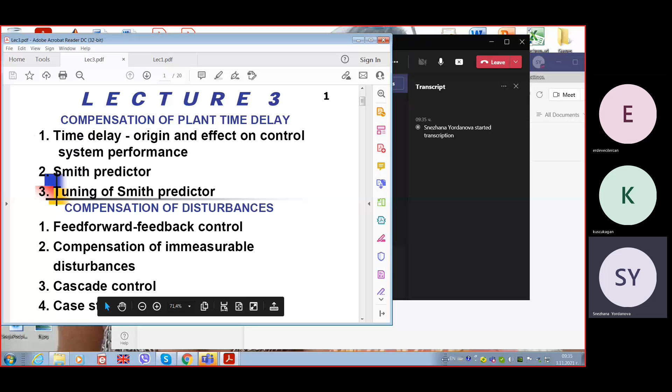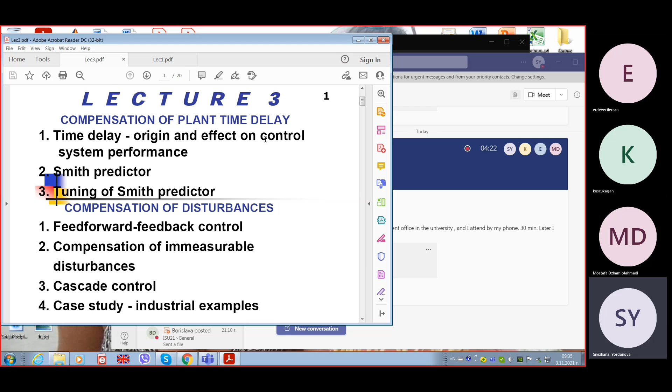So process control, manufacturing automation or production automation. Today's lecture on 3rd of November is about compensating of different imperfectness of the characteristic of the plant. We start with very high relative time delay, its origin, effect, and why it's necessary to compensate.

Compensation of the plant time delay means that the plant model, which is first order time lag, this is the plant model, time lag and time delay. The ratio tau over T is greater than 0.5. This can be due to different reasons. Approximation, of course, because we have experimental S-curve and the model time lag with time delay in series gives this dashed line.

As a result, they tend to join the two lines, the experimental and the model. But there is discrepancy between the characteristics, and for the time when this tangential line crosses the axis, this tangential line in the inflection point covers the linear part of the step response. So it crosses the axis, which is time, in a point from which to the origin is the time delay.

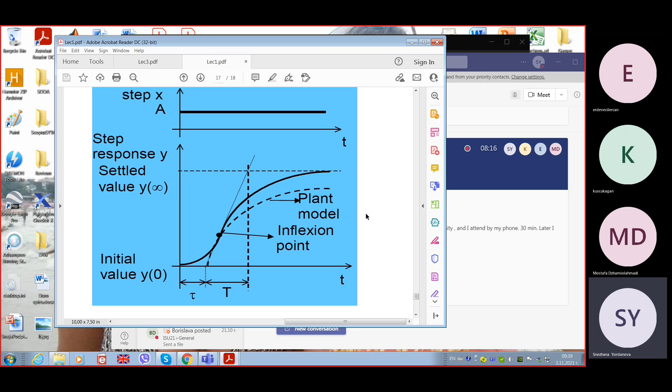So the next reason is that we have a very long room, and the variable we control, for instance, temperature, takes different values and has different step responses at one and the same change of input. The change of input is hot ambient temperature in the cooled room during summer, and when this temperature is measured in different volumes, equal volumes, but the room is very long and it's divided into different volumes, within a volume we have one and the same step response.

So θ1 is temperature in volume 1, temperature in volume 2, and so on. But these responses differ in adjacent volumes. This is because temperature depends not only on time, but also on space variable. Here only the distance is important, but space has three variables.

So if we consider that within a volume we have time lag with time delay model, Ziegler-Nichols modeling of this step response, the parameters will differ from volume 1 to volume 2 to volume n, the final volume. So we'll have different tau, T, and gain. The gain was delta change of output per delta change of input.

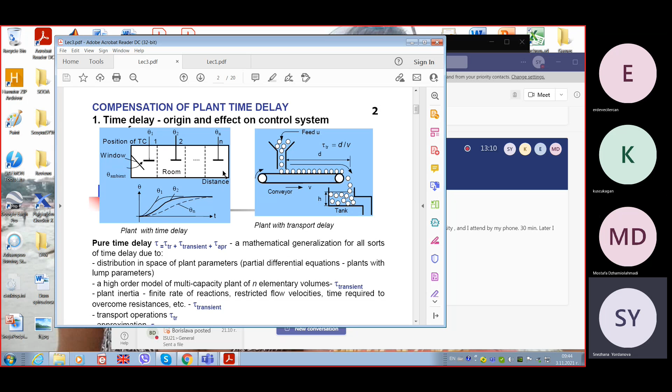These distributed parameter plants are usually presented by separate Ziegler-Nichols models for each volume. So we have in series several plants. So we have a plant of high order because the series connection of transfer functions is the product, and the product of several time lag elements means a product of several polynomials, and the denominator is responsible for the order of the plant and the order of the closed loop system also.

So we increase the order of our plant by presenting space distribution by series connection of simple Ziegler-Nichols models. So the delay origin is now clear, and what we have is why should we compensate the relatively high time delay when it's greater than 0.1 or even 0.5, when it is greater than 0.5 or even greater than 1.

All methods for tuning of controllers expect that this ratio is less than 1. When it's greater, this means the delay is greater than the time constant. Then we need some compensation techniques for this great relative time delay because it affects the stability of the system.

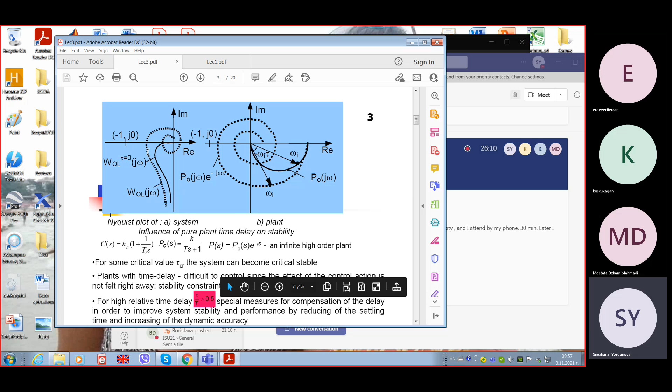So we take the biggest possible gain, and the system will remain stable, no way to violate stability. So when we add the delay block, if the plant needs a model with time delay and the time delay is very high with respect to the time constant, we'll obtain this snail shape of the Nyquist plot of the open loop system, which at some critical value for the time delay can make the system critically stable, or even unstable if this characteristic crosses the negative axis beyond the Nyquist point. So somewhere after this Nyquist point.

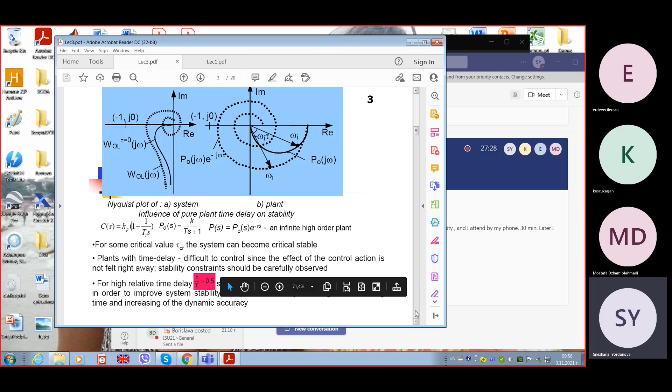So what is important is that we have limited gain of the controller, which has to account for the time delay. So the greater the time delay, the smaller the gain of the controller. We cannot expand this characteristic that much. And at some very small gain, because the delay is very high, our control is not effective. That's why we need compensation measures for this high time delay. And there's a simple scheme, the Smith predictor.

The Smith predictor is using artificial feedback with a specifically designed transfer function, which encloses our standard controller. For instance, we have a PI controller C(s), and we have to compute the feedback in a way to eliminate the presence of time delay in the denominator. So the closed loop system contains a plant with time delay, and it's present in both numerator and denominator, and we'll try to compensate through this feedback only the stability impact of delay, so the delay block in the denominator.

So this is a standard closed loop system without the feedback. And when we put the feedback, the feedback controller is called Smith predictor because it predicts the behavior of the plant when the delay elapses, when the time is greater than the delay. And this predicted behavior is properly accounted for with the control action.

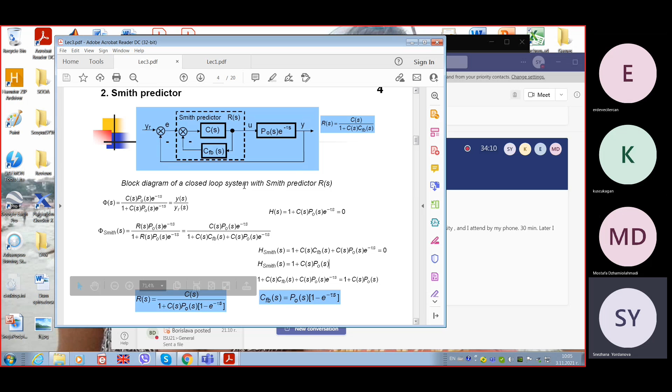So let's explain how the compensation is accomplished. During the time delay, our controller should work with a smaller gain. Let's have proportional controller because it's easy to explain. And this is the feedback. Plant model without delay and parallel 1 minus the delay. This is a negative feedback. When we apply step change of error, the controller reacts with step change of output modified by the gain of the controller. So this dash line could be if we do not have this feedback to the controller. But with the feedback, what happens?

At first, the controller responds with the control action, which is Kp multiplied by E, but then this output feeds a time lag, which with minus appears in this summing element. So time lag, it is the signal minus V, and time lag, but after the delay, so we repeat this reaction, but after a delay time, and because here we have minus and this is minus, minus and minus in series, the result is plus. So the blue line, this exponential growth shifted after the delay time, is the signal W at this point, so taken with plus. So at this point, we have to sum these two signals to obtain the feedback.

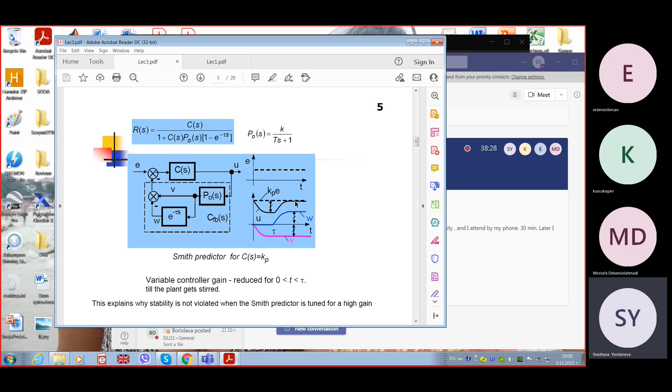So this feedback stops operating after some time, when we have almost 2 times time delay. So for the time delay, when we need smaller gain of the controller to ensure stability, we have this adaptive smaller decreasing gain. After that, we have perfect behavior. We can use high gain. We'll obtain good compensation of disturbance and fast following changes in reference. So reduce dynamic error with high gain of the controller. So this is how the Smith predictor acts with adaptive gain, and the idea of tuning of the controllers is modified.

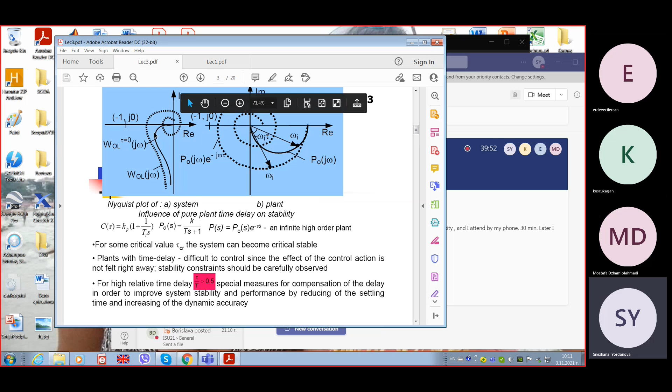You cannot tune your PI controller using these engineering formulas we studied in previous lecture, but we have to account that the presence of the feedback is making the system characteristic polynomial a second order system, because the delay is no longer present in the denominator, and when we have PI controller and time lag, the system is second order. So second order system I showed you. The Nyquist plot is the solid line. PI controller with plant time lag without delay. The open loop is this product, and the Nyquist plot, when S is substituted by J omega, gives this result for different frequencies.

We can expand, so what we are going to do, use very high gain of our PI controller, considering only the range of input. So in our first laboratory, we assign gain of the controller 10, the top possible. Then we have a second order system. We can use one of the methods for tuning of second order system. I will revise taking lecture 2,

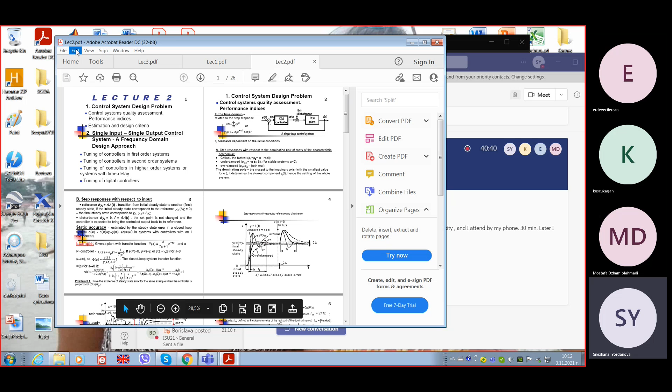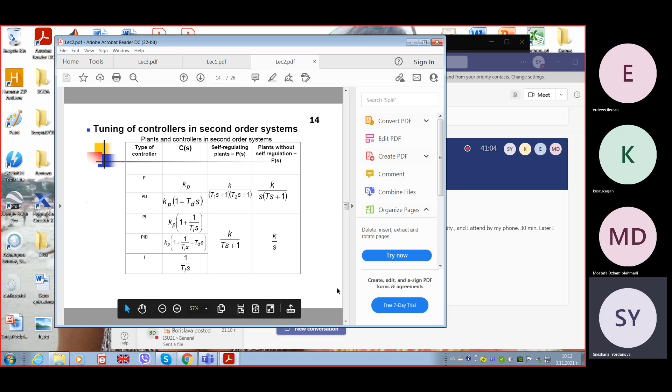and we started tuning first order system, second order system. So this is first order system, and here the combination PI with plant model time lag gives a second order system, and the possibility is to allocate two roots of the characteristic equation, one very far from the axis in the root plane, the other at distance which is related with the settling time.

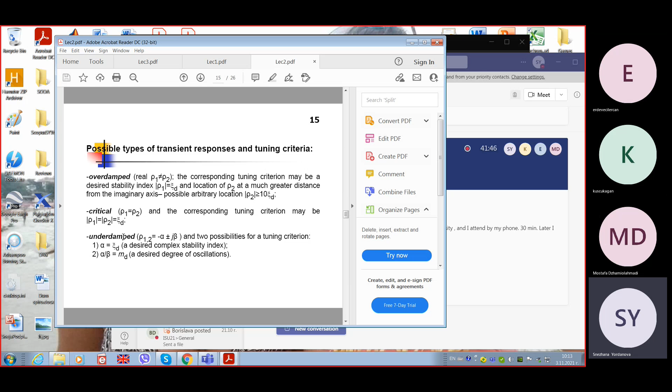Or we can have equal real roots, and that will ensure critical step response, only with one maximum over the reference and no oscillations, or underdamped process if the roots are a complex conjugated pair.

We use the characteristic equation to obtain the roots, and then if the discriminant is smaller than 0, so it's negative, we put a negative sign and the imaginary unit here to make the square root of a positive discriminant. So this positive discriminant with the numerator gives beta in the root, the imaginary part of the complex conjugated pair of roots, and this is the rest.

This part is alpha, the real part. This is positive, and the minus shows that we ensure a negative real part, or a stable system. Alpha over beta gives the desired degree of oscillations, so the degree of oscillations is related with overshoot and other time domain performance indicators. So we select the desired degree of oscillations, and the result is a relationship between Kp and Ti.

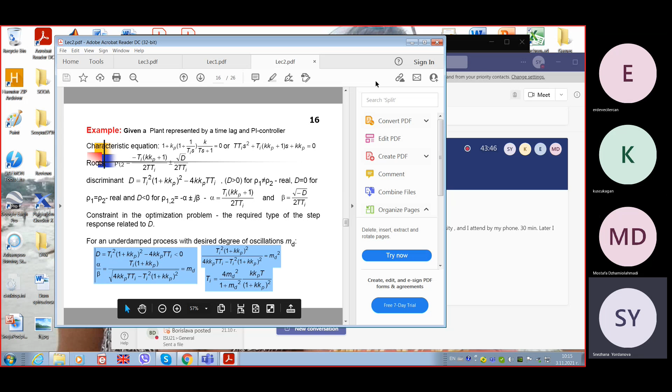Kp is 10, so we don't need any other second criteria. So Ti is computed on the basis of the plant model, time lag model parameters, the desired degree of oscillations, and the top gain of our controller. So this is important. If we do not use the highest possible gain, which allows us this feedback, the feedback cannot be tuned because it contains parameters of the plant model.

The plant model is necessary to tune this controller to obtain the feedback, but we can tune the controller knowing that we can use a very high gain, which is not possible if the system contains time delay in the denominator, or the plant has very high time delay. We need the feedback first, and then we can have very high gain.

So if the plant changes with respect to the model which is put as feedback to the controller, we will have worse performance of the closed loop system. So it's important to be sure that the plant model is precise and the plant doesn't change its characteristic with time or under different influences.

So the high gain ensures very short settling time, the high gain and the feedback to control. So the Smith predictor is more effective when we properly use the possible high gain of the main controller, the standard PI controller.

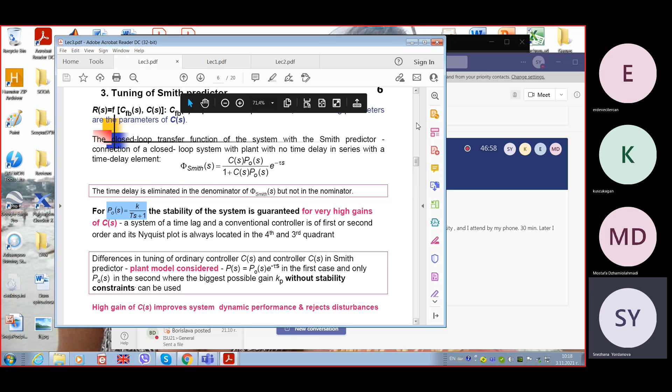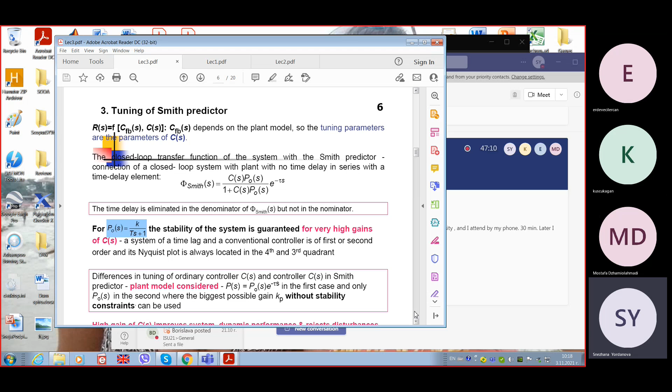So we compensate with feedback only the denominator. So we try to get rid of this time delay, but this is preserved. That's why the step response has an initial time delay from change of output. So from here till settling, practically equal to the reference, of the output Y. This is the settling time. So it's, let's say, 5 times greater than that of a Smith predictor.

And during this time, when we have a difference between reference and output, we have dynamic error, which means that the process inside behaves not in a normal way. So the production can be even of low quality. So we have to reduce these oscillations, reducing settling time and maximal dynamic deviation, both with respect to change of reference and with respect to disturbance.

Here we use a negative step change of disturbance. That's why the output starts to decrease, with again the settling time of the Smith predictor system 3 or 4 times smaller than without the Smith predictor.